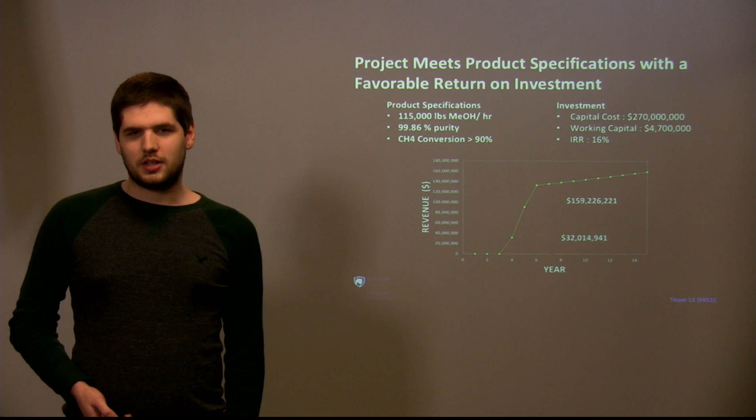Before we proceed, I would like to discuss the final results that we were able to determine. The product specs that we were required to meet were a flow rate of at least 114,000 pounds per hour of methanol product. We were able to achieve a flow rate in excess of 115,000. The purity spec that we had to meet was 99.85%. We were able to make a product stream that was 99.86% pure.

At least 90% of the methane in the feed had to be converted to methanol, and more than 91% was converted. So all of these hard specs were achieved. In the end, we required a capital cost of nearly $270 million with a working capital of $4.7 million. Our IRR ended up being 16%. As you can see in this graph, after year 4, we were able to make nearly $32 million in revenue, and after 15 years of plant life, this value has increased to nearly $160 million.

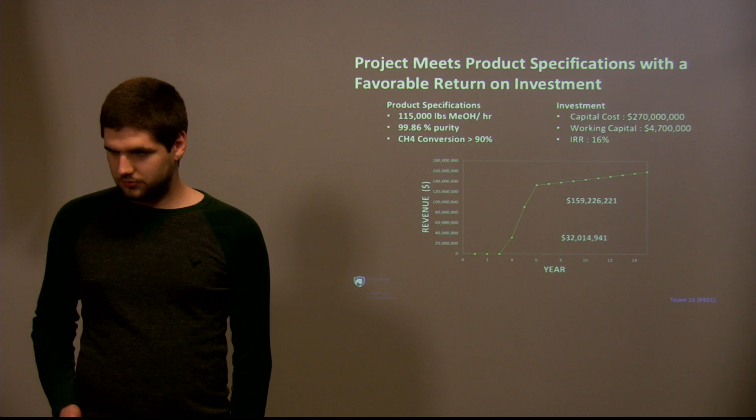Midline Chemical gave us freedom to decide how exactly this plant would be designed, but they required that we follow two major technological methods. The first was that the natural gas feed be converted to syngas, carbon monoxide and hydrogen, using a steam reforming process where the heavy hydrocarbons, the ethane, propane, and above, would be converted in a pre-reformer, and then in the larger, more expensive SMR, the steam methane reformer, the methane would be converted to more syngas. The syngas would then be converted to the methanol using a Fischer-Tropsch process in a shell and tube reactor that will be discussed shortly.

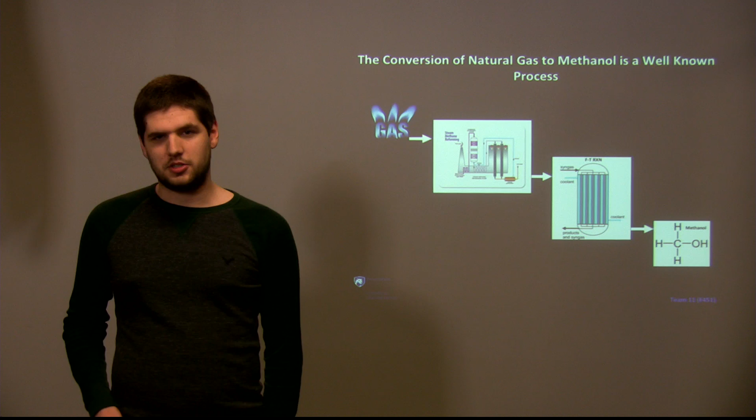Some of the key specs that we had to deal with were the location. We were bound to work with the standards of Philadelphia, so we had to account for any cost issues with this and deal with environmental and safety factors with this location that go with a large city. As mentioned in our summary earlier, the specs that we had to meet were a 90% conversion of methane in the feed, while also achieving a product that was at least 99.85% pure. Our feed was 40 million standard cubic feet per day of natural gas, which is more than 90% methane.

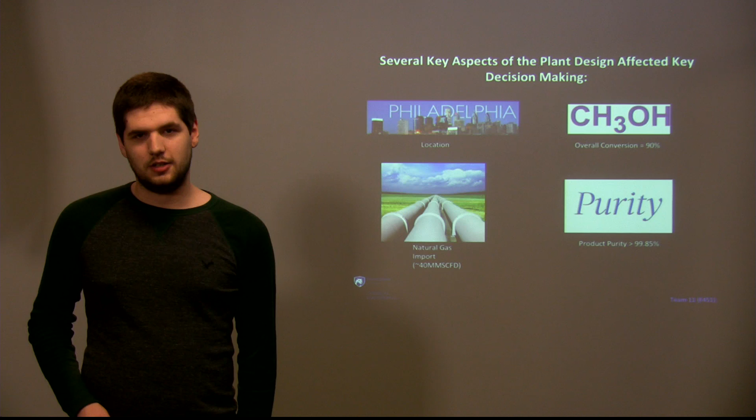In designing our methanol plant, we have basically 3 stages. We have the upstream in making syngas from the natural gas feed, downstream in making methanol, and of course the purification of the final product. To start off in the upstream part, we have a natural gas feed coming in that needs to be purified before we could actually create our syngas. To do this, there are 2 toxic chemicals, mainly mercury and hydrogen sulfide. Mercury isn't as much of a safety ramification on design, but hydrogen sulfide is corrosive to carbon steel and poisonous to catalysts.

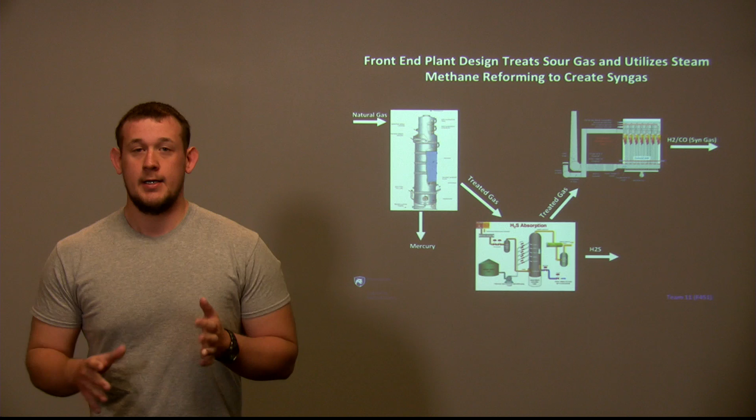Now, from there, we could go to pre-reforming and steam methane reforming. The natural gas going into the pre-reformer basically knocks out all of the heavy hydrocarbons, which then enters the SMR. The SMR converts our natural gas feed into syngas, which is basically carbon monoxide and hydrogen. The SMR is also a large safety concern as it operates between 2000 and 1600 degrees Fahrenheit.

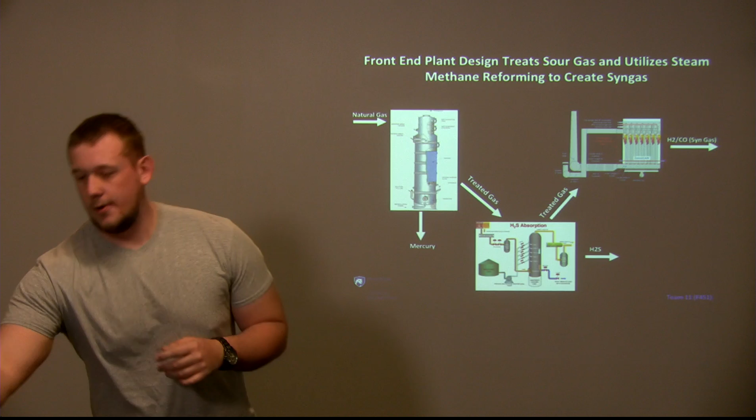Now, I already talked a little previously about the safety concerns. But the main ones, as I said before, are the hydrogen sulfide and mercury, which are both corrosive to materials and poisonous to catalysts. And another big factor, especially around the SMR, is high temperature hydrogen attack. At higher partial pressures and very high temperatures, especially above 1,000 degrees Fahrenheit, high temperature hydrogen could completely destroy any carbon steel. So we're going to have to use high strength, low alloy materials through this.

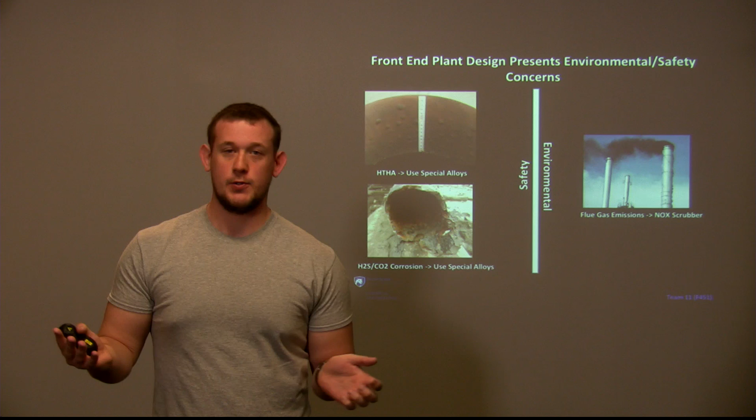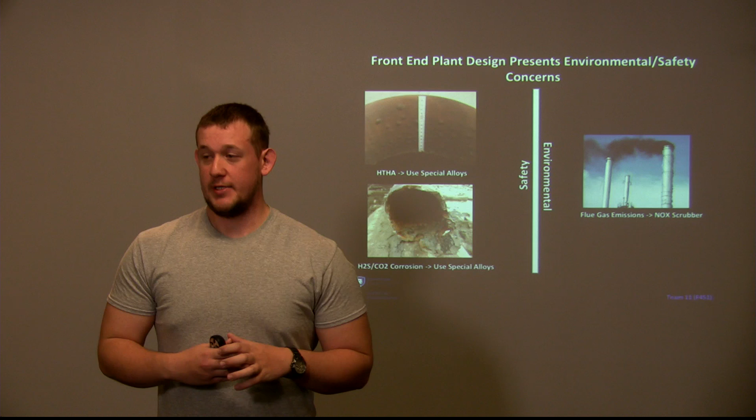And basically from the front end of the plant, we're going to have to use stainless steel through the mercury absorber and through the amine scrubber. Then we have to go to a high strength, low alloy steel throughout the SMR and the integrated heat exchangers. After that, we could switch back to carbon steel, as that is most economical for our process. But another safety concern is our flue gas emitter coming off of the SMR. Basically, nitrogen oxide and carbon monoxide also present a problem, so we will need to implement a NOx scrubber. But besides that, the rest is all carbon steel for economical purposes.

Now going into the downstream plant design, this is where we actually convert our syngas from the steam methane reformer into methanol. This has basically three big units, which are the compressor, the FT reactor, and a condenser drum. Now, provided by Knitline Chemicals and our R&D department, we were able to acquire conversion data from carbon monoxide and hydrogen conversion to methanol. This occurs around 7 megapascals or 1000 psi and about 480 degrees Fahrenheit.

To do this, we need a series of compressors to get our syngas feed up to the right pressure, and we utilized a heating shell and tube heat exchanger for the FT reactor. Now what happens is, after compression and we are at operating conditions, the syngas will flow through the top of the reactor down through the bottom, and we'll have a cooling solution of just basic city water going through the shell component in a countercurrent flow. This occurs completely at isothermal conditions to obtain both purity spec and the capacity spec of our final plant or product.

Now, a big concern here also on safety is we're dealing with very high pressures here of 1000 psi. So of course gauges of piping and thickness is also a big concern. And for operators operating around here, there are several safety hazards to be implemented to avoid any type of harm.

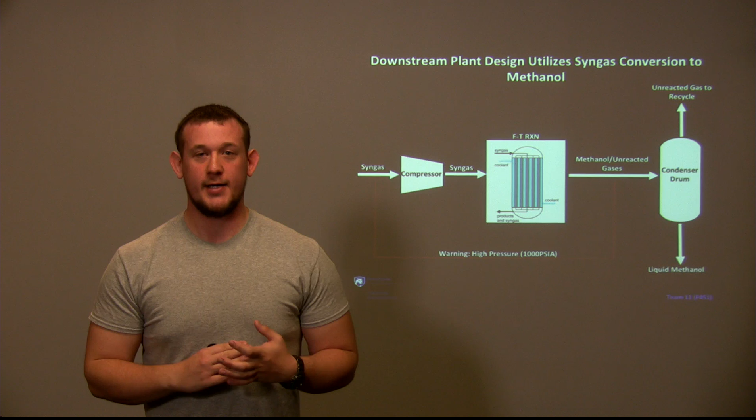But after the Fischer-Tropsch reactor, we basically knock out our crude methanol in a condenser. Now, we basically knock out all of our liquid methanol that goes on to purification, but throughout the top, we have a whole bunch of unreacted syngas. This gets rerouted through a recycle system to get reheated, recompressed, and back into the FT reactor. This will both maximize conversion while being most economically favorable.

So as was discussed earlier, we now have a crude methanol product that needs to be purified so we can meet our specs. Downstream purification occurs via two distillation towers in series. Crude methanol enters our first distillation column, which is a full reflux column around 25 trays. We knock out any trace syngases that came out with the liquid methanol in the bottoms of the condenser drum previously discussed by Mike.

The bottoms product in distillation column 1 is now refined or somewhat purified methanol that also contains a significant amount of water and ethanol still. So this needs to be funneled into distillation tower 2, which is a total condenser tower and contains about 80 trays. In the bottoms of this tower comes out water and ethanol, and in the tops is our methanol product. This methanol product is about 99.86% pure, and it also meets our product spec flow rate by achieving almost 1,000 more pounds per hour than needed at 115,000 pounds per hour.

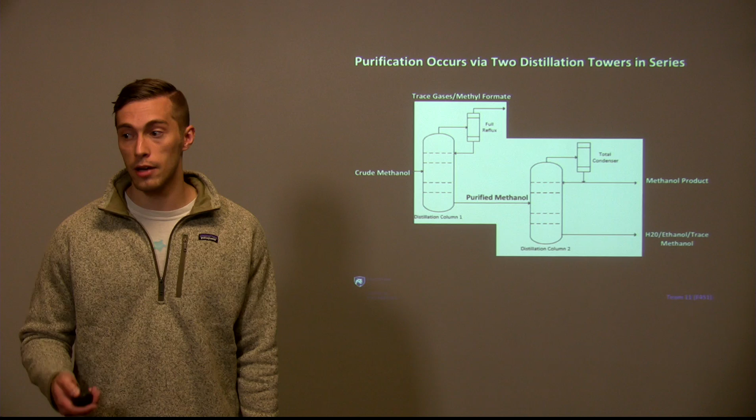Now, distillation tower 2 heavies need to be properly disposed of. We have a crude mixture here of water, ethanol, and actually some methanol that comes out as well, just due to the nature of distillation towers. In order for a biotreatment facility to accept our water mixed with alcoholic hydrocarbons, we need all alcoholic hydrocarbons to be below 3% total mass. To do this, we funnel in some extra deionized water to further dilute the crude heavies before we can then send that off to a biotreatment facility where it will be processed.

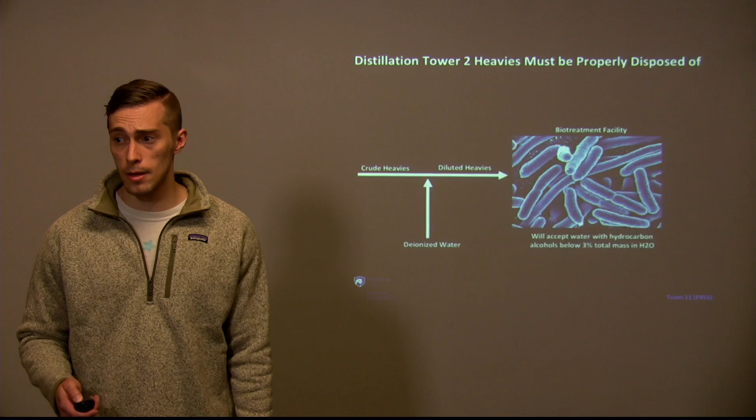This is our BFD, which puts the overall process in perspective. It contains what was discussed already in the front end process, which was the conversion of natural gas to syngas. It also contains the conversion of syngas to methanol via the Fischer-Tropsch reaction, and also the purification steps I just talked about. So I'll give the audience here a couple seconds to just glance over the entire process.

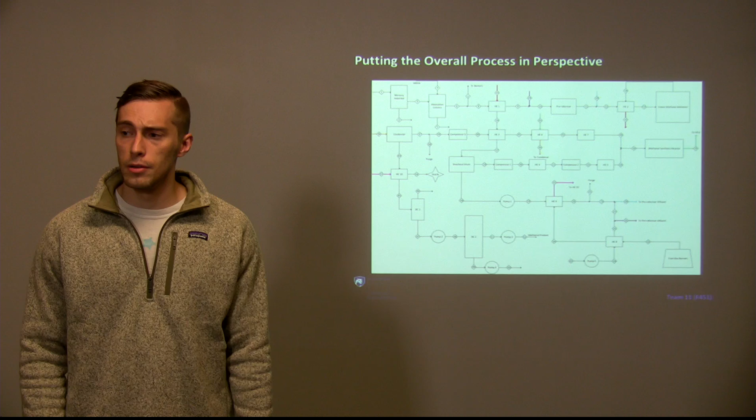Next, an economic analysis for capital costs was performed. I broke the economic analysis down into an inside battery limits cost, an outside battery limits cost, as well as other capital costs that are involved in initially building a plant. Our inside battery limit cost came out to about $115 million. Now, the big spenders for this were our SMR, around $70 million, our pre-reformer around $10 million, our compressor units were around another $10 million, and our heat exchangers were about $13 million. There's a lot of other equipment we had to purchase, but those are the significant high-value purchases.

Our outside battery limit capital investment came out to about $70 million. What exactly did this include? Well, we had to buy the entire site and land where we built this plant. We also had to account for creating product storage facilities, equipment that was involved for utility lines, as well as storage tank and equipment lines involved in environmental and waste disposal.

Lastly, we also had other capital costs. These other capital costs came out to about an additional $50 million and accounted for all of the catalysts we needed to purchase for startup costs and startup operating costs, as well as team costs and a few other costs. Adding these all together, with a 20% contingency factor to account for the uncertainty associated with many aspects, especially Icarus, we get a total capital cost investment of around $270 million.

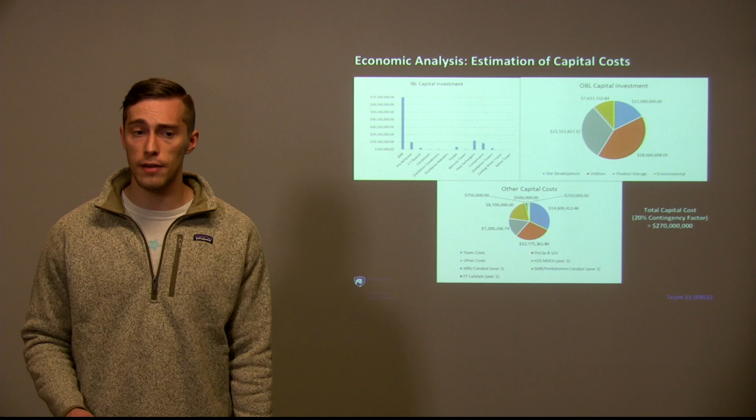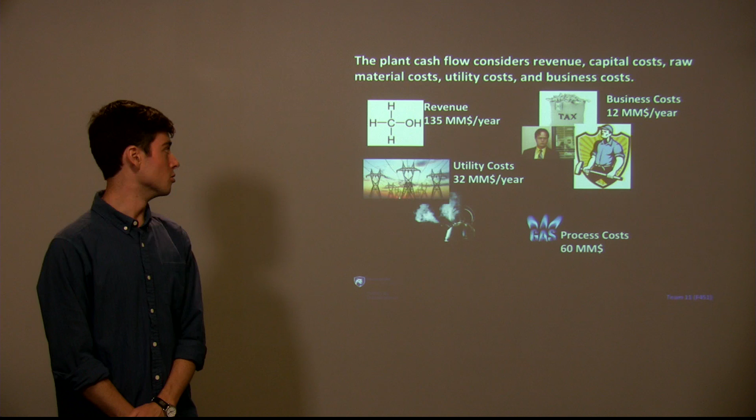The business costs are a larger menagerie of costs. They include a corporate income tax rate of 35% on our income. They also include the operator costs. Most operators cost about $80,000 per year, and if you assume about 4 operators per shift and 3 shifts a day, that ends up at pretty much 12 operators total at $80,000 per year each.

Finally, process costs include mainly our natural gas cost. Also included in that is our MDEA, catalyst, and things like that. So, to sum up, our revenue approaches $135 million a year, whereas our utility costs, you subtract $32 million a year, our business costs, you subtract another $12 million a year, and our biggest cost, our process costs, we subtract

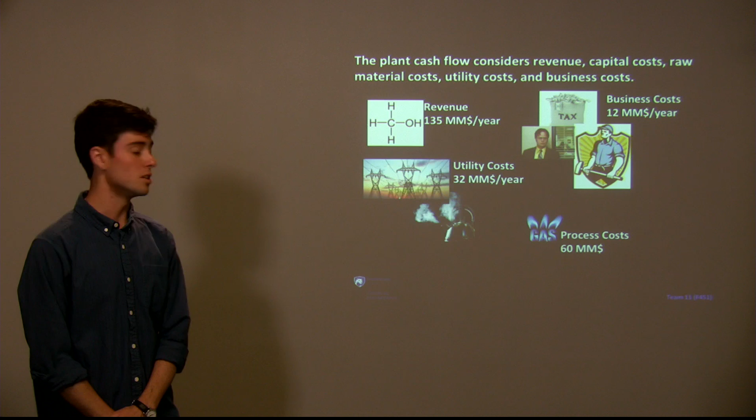$60 million a year. But moving forward, that gives us a net back of $32 million a year on average, not accounting for inflation or process scale-up, which is pretty significant over 15 years, and considering about 7 years of making somewhere around $32 million a year, we can really put some much needed cash into our cash flow.

Now, what is interesting to note, and probably the most important economic evaluation, is the internal rate of return, known as IRR. This plant gets an IRR of 16%, which is vital to the plant's success. It is greater than 9%, which is the discount rate. The discount rate is the rate at which a bank would essentially give us a loan, or we could get funding through our parent company. So when the internal rate of return is greater than the discount rate, a company will often greenlight a project.

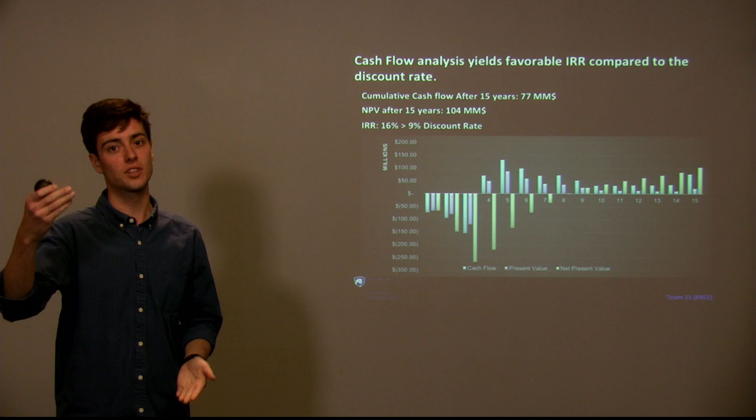So that really pushes us into the positive for the company by year 8, and by year 15 we reach a net present value of $104 million, which is less than the capital investment, but the company actually makes that above the capital investment. So it is a profitable idea, both from the idea of net present value after 15 years, and the internal rate of return is greater than the discount rate.

Both of these are key to approving a capital investment, and according to our research, if we start building this plant by 2020, it would be a good idea for Knitline Chemical to accept our bid. Moving forward with some recommended issues. We should still tease out exactly what discount rate we might get, but also sometimes an issue with IRR is, if it's a very short project, you can get a very high internal rate of return, but you can have a very low net present value.

So just consulting with someone who is maybe more of an economist, figuring out exactly if these values are worth investing in. Other areas of improvement that may reduce our process and utility costs are better integration of heating and cooling streams, so we can always have more heat exchangers, increase the capital cost but decrease utility costs. That is kind of a one-time cost versus a continuous cost, so that could save us a

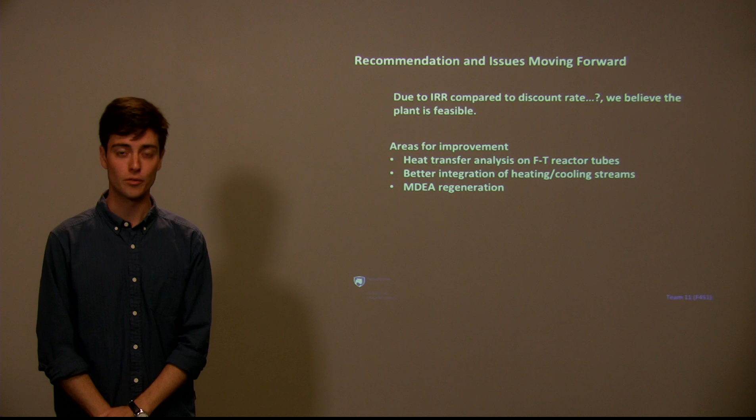lot of money, as well as sending our Fischer-Tropsch initial designs, known as FT designs, to a research group to know exactly the temperature profile within the tube. Considering it is an exothermic reaction, it could be a very dangerous situation if the center line temperature of the tube gets much greater than the other areas of the tube. The Fischer-Tropsch reactor is an area for improvement that is beyond the scope of our current project.

Finally, another interesting cost benefit analysis is looking at MDEA regeneration versus what we do now, which is sending MDEA throughout the plant. So MDEA regeneration again will be an increased capital cost, but a decreased utility cost, which could really add up over time. However, currently our internal rate of return says this is a green light project, so MDEA regeneration could just be the cherry on top of the sundae.

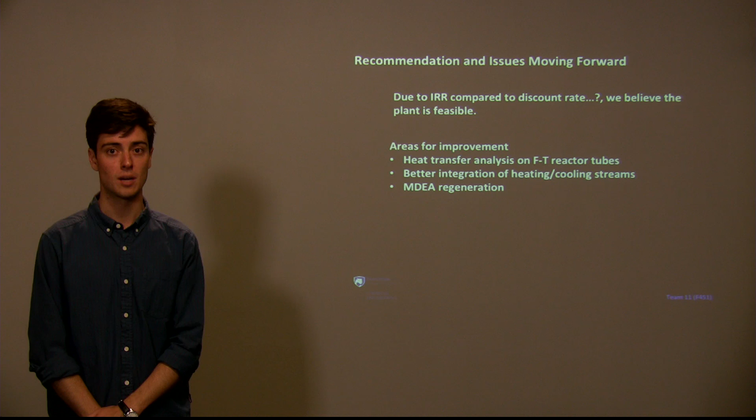Overall, we should build this plant. It will make a profit.